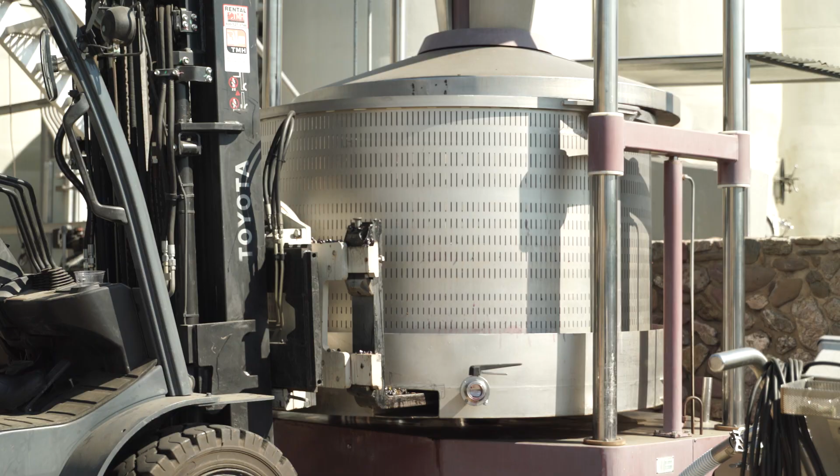This area where I'm standing today is part of the vineyard-rich region of Northern California in the United States. The natural beauty of this vineyard is a testament to the timeless art of winemaking. But however timeless, over the millennia, winemaking has undergone some notable changes. Since our ancestors first stumbled upon the first glass of wine and the concept of fermentation, winemaking has evolved into a modern art that leverages the technologies of the 21st century.

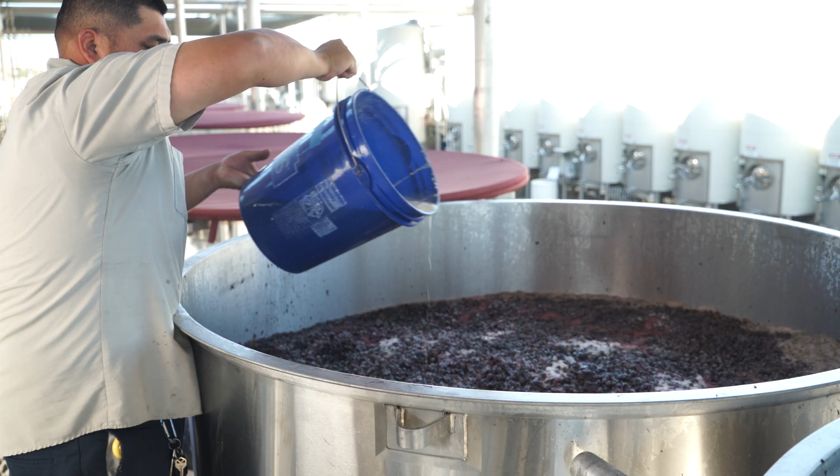Nowadays, technologies like machine harvesting, automated bottling, and advanced lab testing equipment are available to increase the efficiency and intricacies of winemaking. Regardless of the technologies that a winery chooses to adopt, every winery follows wine's natural scientific formula, namely fermentation. During the fermentation process, the sugar in the grapes is consumed by yeast and converted to alcohol, heat, and carbon dioxide. The released carbon dioxide protects the fermenting juice from oxygen, and in this anaerobic environment, grape juice becomes wine.

Wines are generally considered a low microbiological risk product because of fermentation and the resulting product parameters. Parameters like pH, alcohol content, organic acids, polyphenols, and sulfites render the wine free from any pathogens. Today we will take a journey through the general process of commercial wine production and throughout each stage demonstrate the proper processes and controls for ensuring a safe product for the public, all the while emphasizing how wine is naturally a microbiologically safe product.

The production of wine starts in the vineyard. Throughout the harvest season, which can begin as early as July and end as late as October, the grapes are picked from the vines. During this time, wineries work around the clock harvesting grapes for production. The winemaker makes a calculated decision about when to pick the grapes. Various indicators like acidity and sugar levels, as well as seed color, firmness of the skins, and berry taste are evaluated to determine the exact picking time.

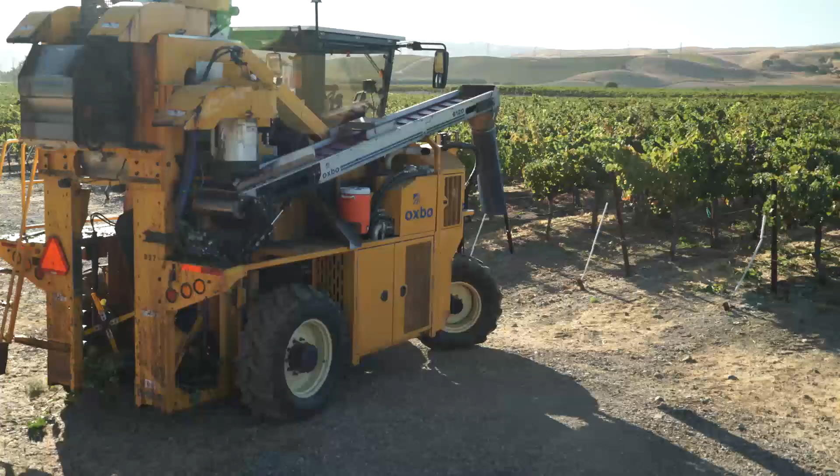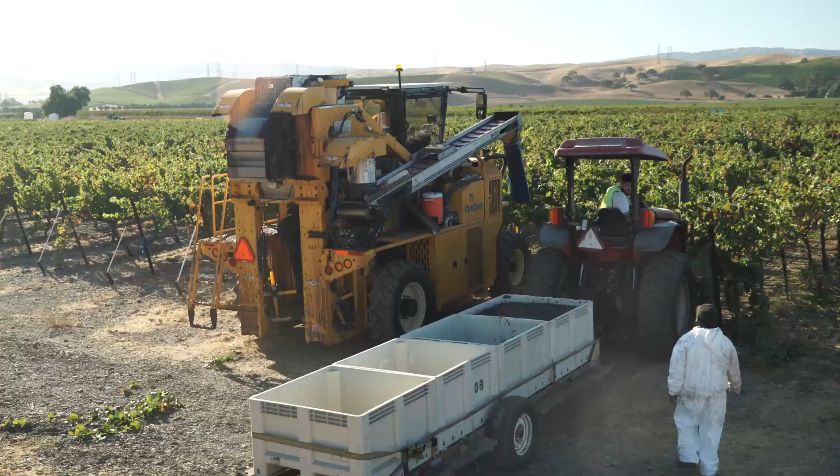There are two types of harvesting methods used by wineries. The first is machine harvesting. Machine harvesting occurs more often at large-scale wineries, seeking to decrease labor costs and harvest time. When performing a machine harvest, a vehicle moves through the vineyard, straddling and shaking the vines to remove the grapes. The second, more traditional harvest method is handpicking. This method is used by many wineries and is often preferred by winemakers for more valuable grapes, since it is a gentler method and yields a higher return on grapes per row.

After harvesting, the grapes are evaluated and any materials other than grapes are removed. This is an important step that workers take to adequately screen the crop for materials such as leaves, twigs, or anything else that is not essential to processing. Let's highlight the takeaways from harvest. Two methods to harvest: machine versus handpicked. Steps to protect the juice are taken very early on. Materials other than grapes, also known as MOG, are removed.

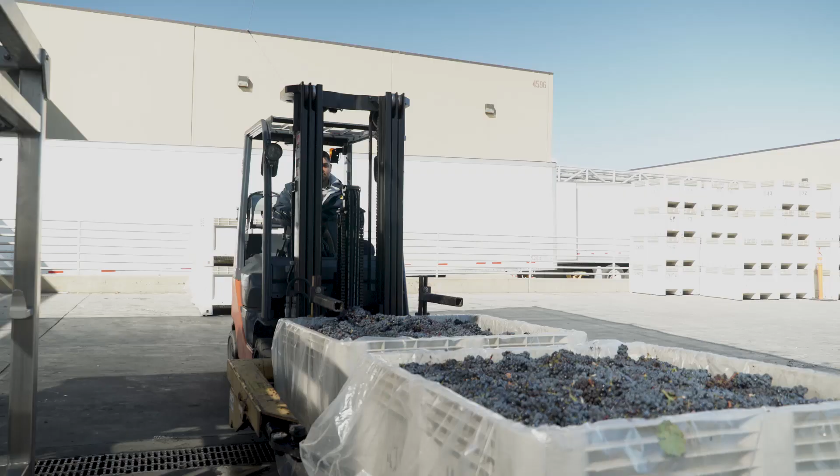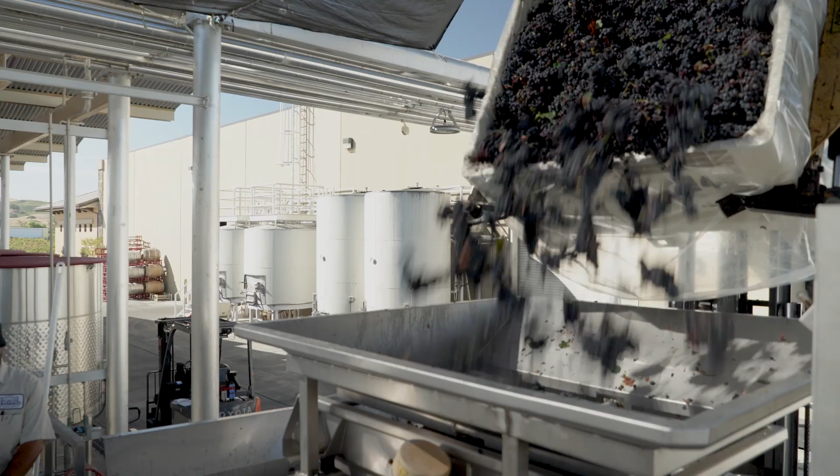Within a few hours of harvesting, the vineyard is barren and the grapes begin the journey to the winery. These grapes are offloaded at a receiving area near the fermentation tanks. Processing usually begins as soon as the grapes arrive. The first step in wine processing is transferring the grapes from the large bins to a crusher to be destemmed and delicately broken.

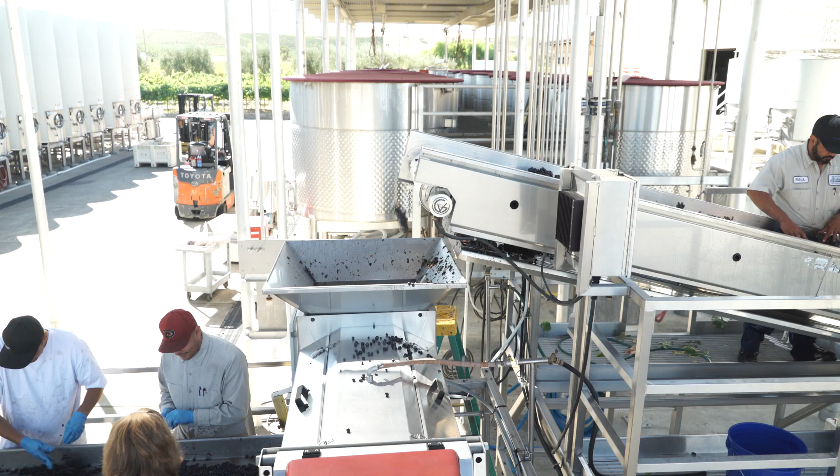After each load of grapes is put into the crusher, the bin is cleaned based upon the facility's standard operating procedure. At this winery, the bins are power rinsed to ensure they are sufficiently cleaned for the next batch. Right before the grapes are crushed, the stems are removed and sent down a conveyor belt.

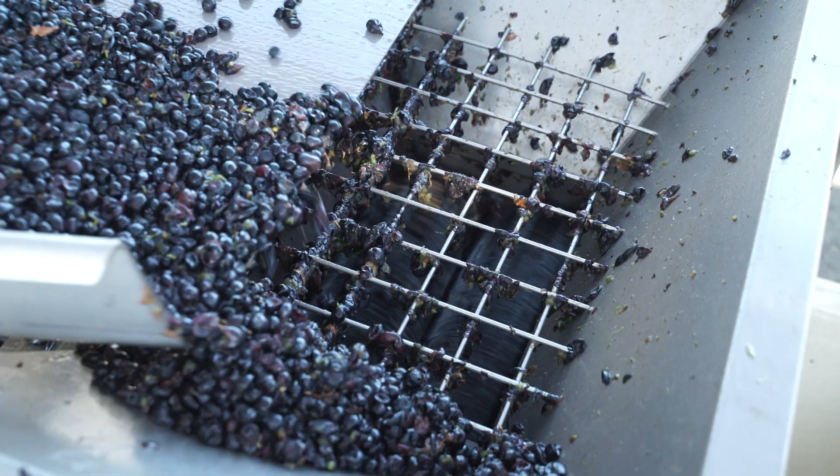Sometimes wineries choose to evaluate any materials other than grapes a second time on the conveyor belt. During the crushing phase, the objective is to open the grapes just enough to mix with the yeast so that it will induce fermentation in the tanks. Ensuring a gentle crush is essential. A grape that is opened too forcefully could crush the seeds, which would release bitter oils or tannins that create an undesirable taste profile for the wine.

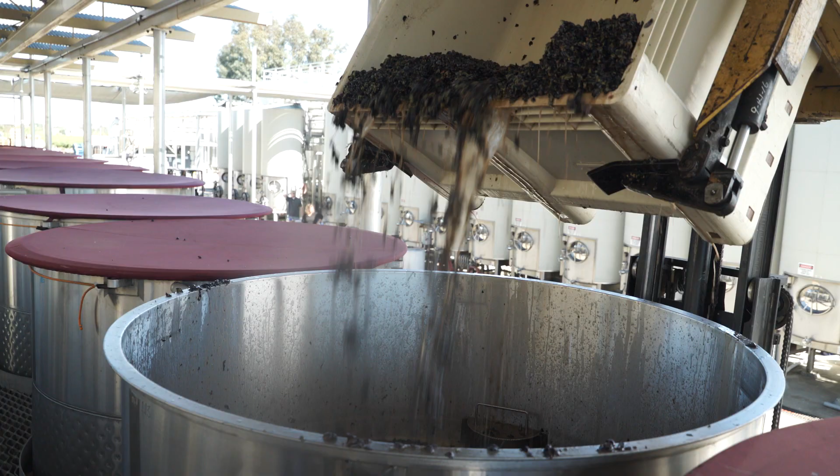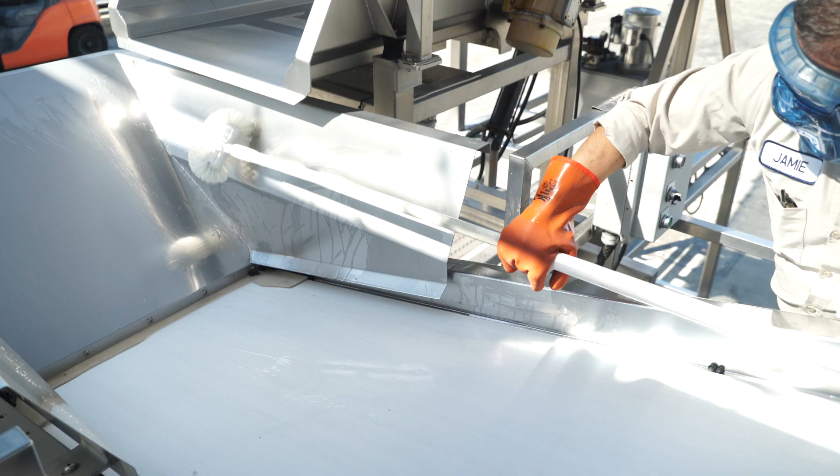Crushing the grapes and removing the stems are steps taken prior to the must entering the fermentation tanks. Must consists of the skins, free juice, and other suspended solids of grape material that results from the crushing phase. Prior to the must entering a fermentation tank, all equipment involved in processing is cleaned and sanitized. Once cleaned and sanitized, all equipment is properly stored.

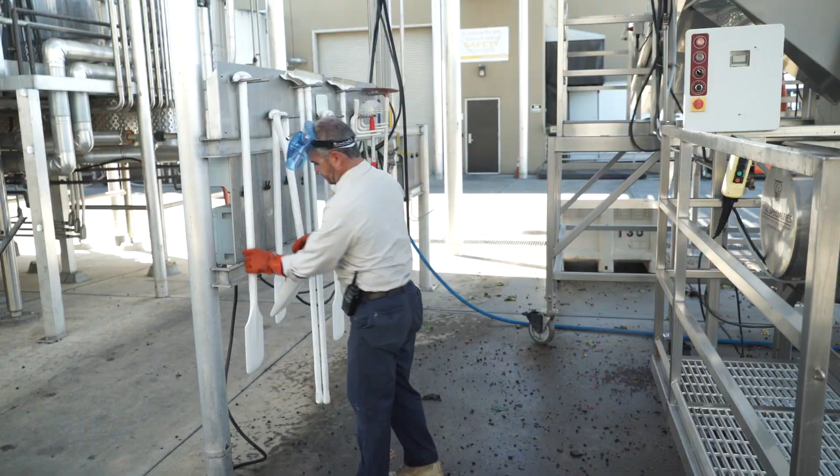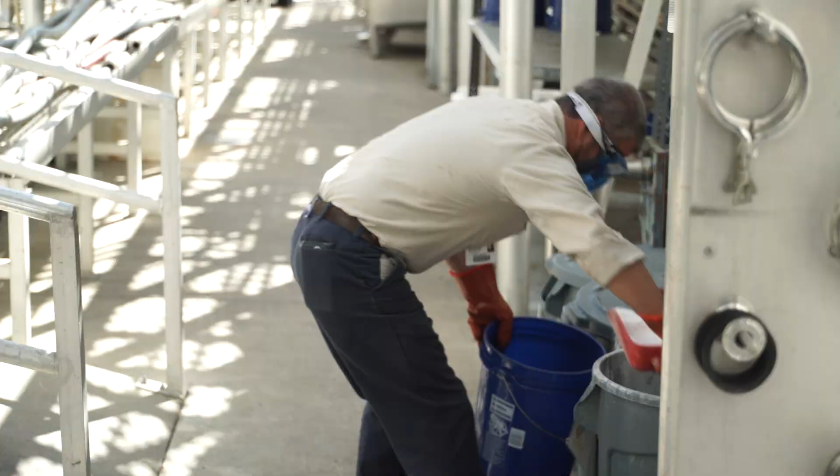Cleaning and sanitation are critical parts of the winemaking process, and the winemaker understands that all equipment that encounters the juice or wine at any time in the process must be cleaned and sanitized using acids, bases, and oxidizing chemicals. Whenever chemicals are used to clean equipment, a worker takes sufficient safety measures by wearing proper personal protective equipment, also known as PPE.

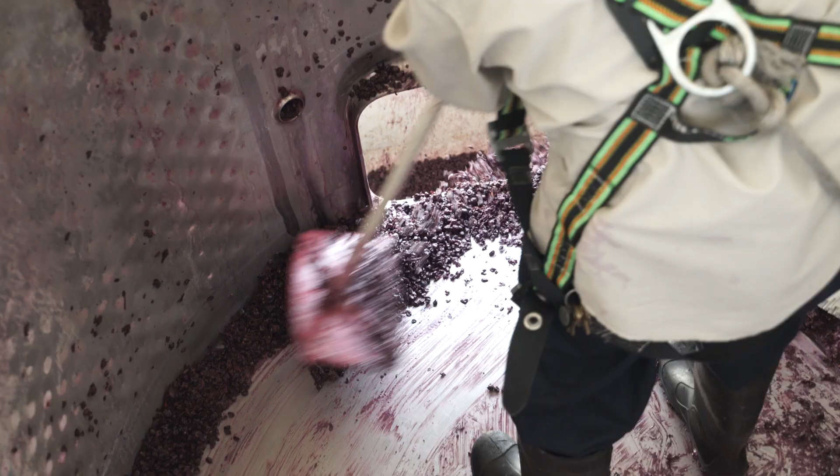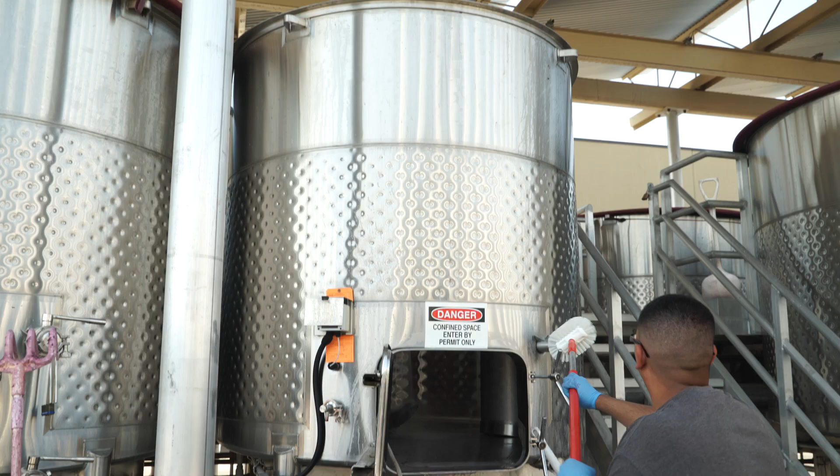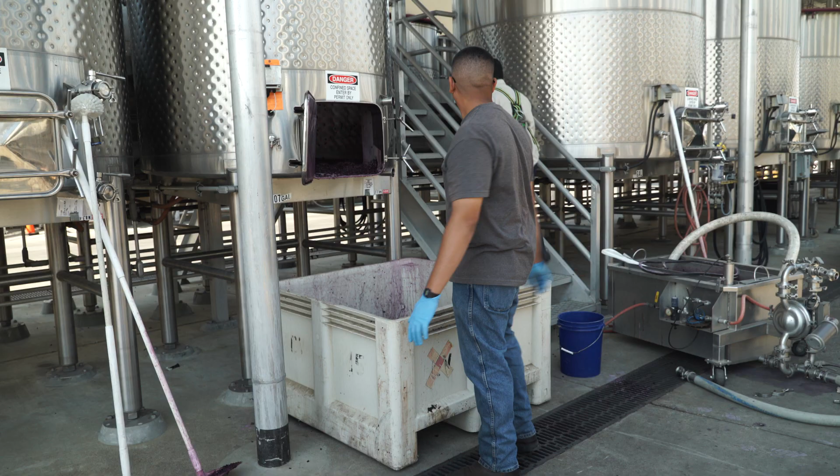A winery's standard operating procedure would dictate the cleaning of the tank. Many fermentation tanks like these are made of stainless steel, since it is an easy material to clean and sanitize. Oxygen levels are also monitored and brought to a safe level before anyone enters the tank. One worker remains outside the tank while the other cleans and sanitizes the inside of the tank. The fermentation tanks are cleaned and sanitized before and after usage. A winery worker will record the date and time of cleaning and sanitation on a log sheet and the tank itself.

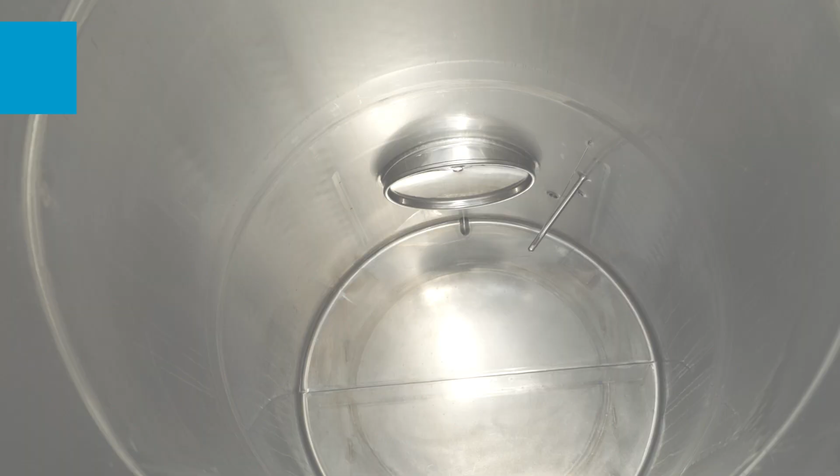Although red and white wine production differ, all cleaning and sanitation concepts and practices are the same. Let's highlight the sanitation practices. Tanks and equipment are sanitized frequently to prevent contamination. Sanitation is part of good manufacturing practices. Equipment is stored in its appropriate locations.

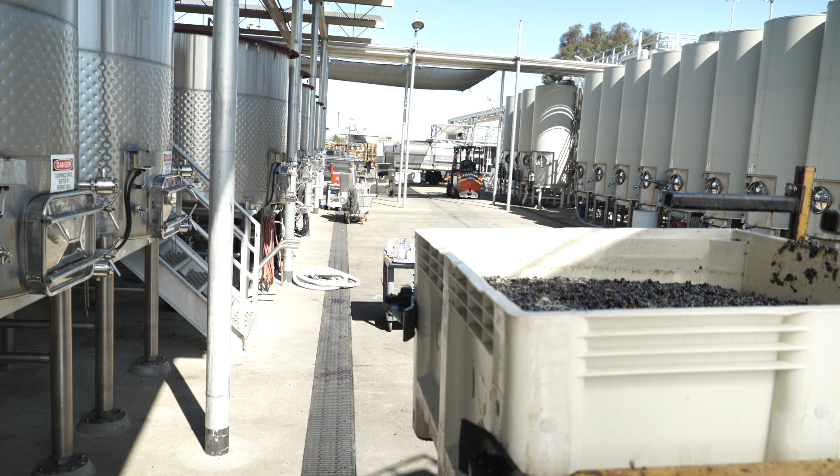In this section, we will focus on how red wine is made. For red wine, the lightly crushed grapes are first moved to a clean and sanitized tank. Once in the tank, dry ice is sometimes added to keep the must cool and preserved. After the tank is filled with the must, fermentation is initiated by adding commercial yeast, a process also known as inoculation.

While the wine ferments, the yeast converts the sugar contained in the must into alcohol, or more specifically, ethanol. The ethanol helps extract the grape skin and seed compounds, which give red wine its color, mouthfeel, and taste. This process is known as maceration. Throughout fermentation, the must is mixed or recirculated. This happens daily to help extract color and flavor compounds from the grape skins.

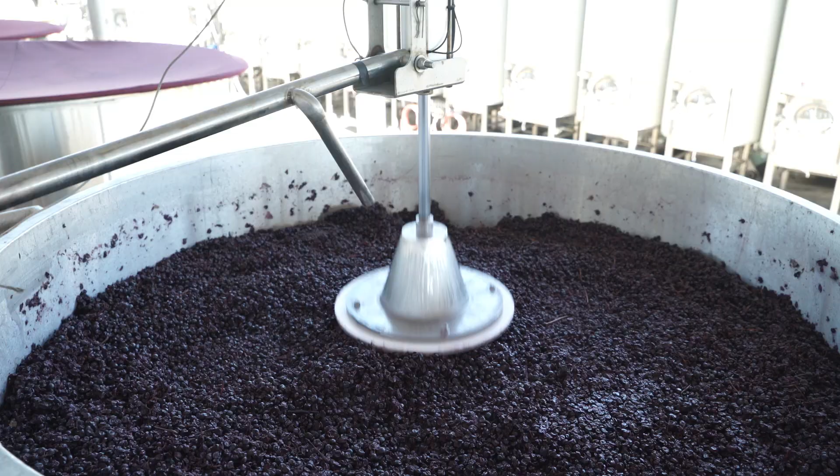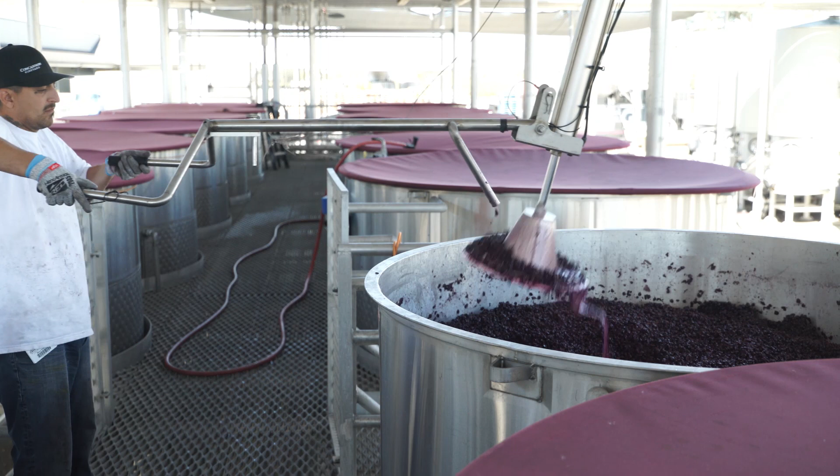Mixing also occurs to keep the temperatures in the tank homogeneous, as heat, which is generated during fermentation, accumulates in what winemakers refer to as the cap or surface of the mixture. The cap is mostly grape skins that rise to the top of the fermenting must due to the production of carbon dioxide. There are two methods for mixing. One is called performing a punch down and the other is a pump over. Both are popular choices among commercial wineries. This worker is performing a punch down.

During fermentation, the winemaker makes important additions to the wine. Potassium metabisulfite is commonly added as a preservative to prevent microbial spoilage. It can also be added to the must prior to fermentation. Found in all wines, sulfites occur naturally as a byproduct of fermentation and are often added to prevent oxidation and bacterial spoilage, thereby enhancing taste, color, and stability of table wines.

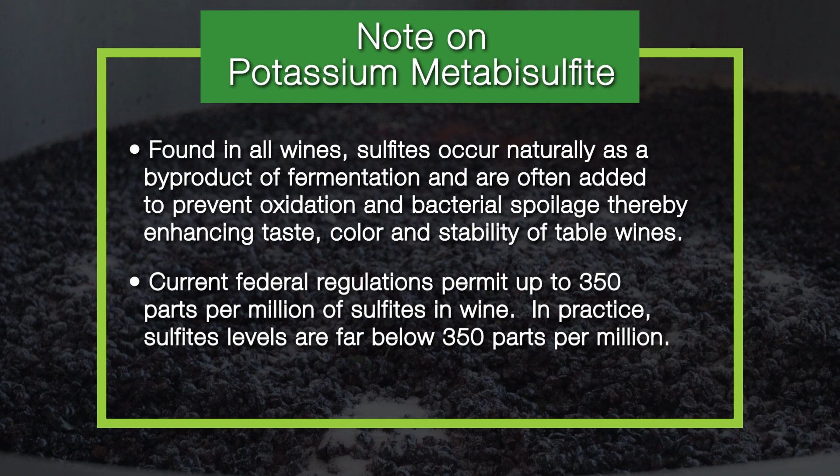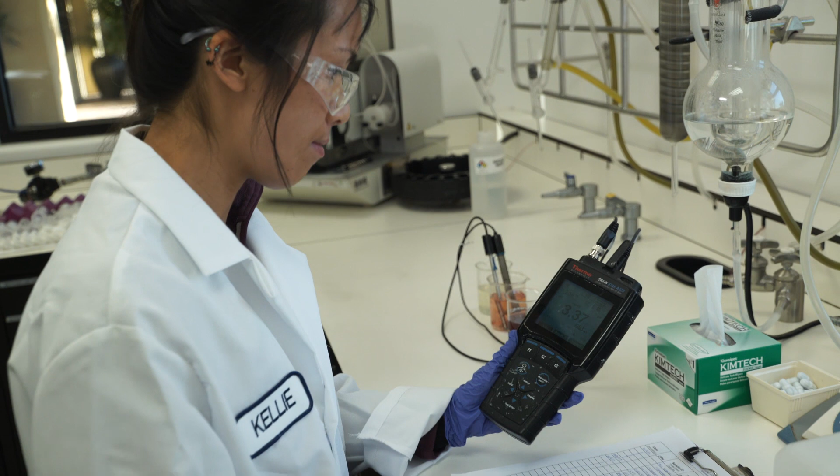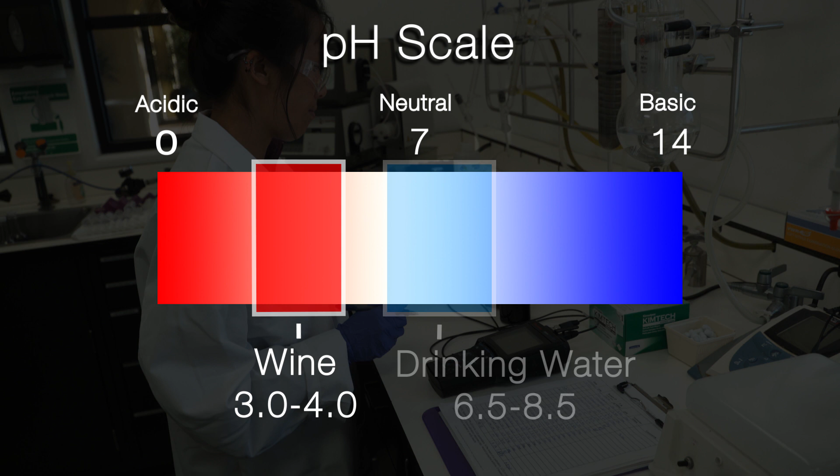Current federal regulations permit up to 350 parts per million of sulfites in wine. In practice, sulfite levels are far below 350 parts per million. Wine relies principally on pH for preventing the growth of undesirable microorganisms. For this reason, the wine is monitored and maintained below a pH level of 4.6. Many wines have a pH range between 3 and 4, which is very acidic. In comparison, a pH of 7 is neutral, and drinking water ranges from 6.5 to 8.5.

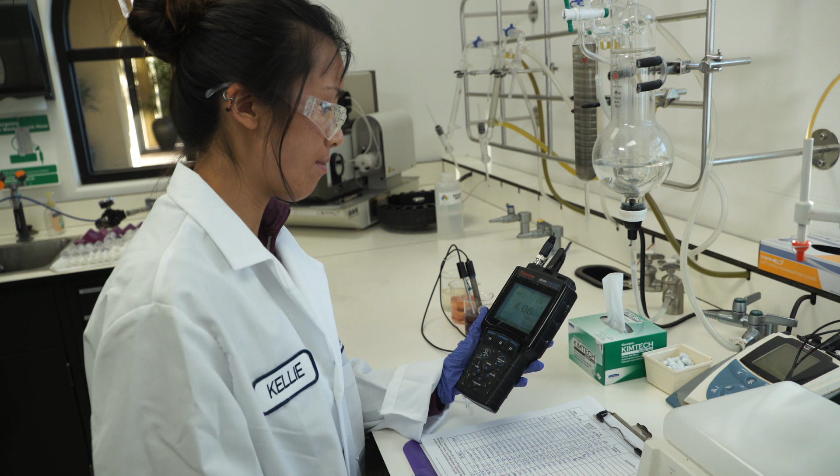The low pH of wine provides significant protection from pathogens. Most foodborne pathogens like to be at or near neutral pH and do not survive below a pH of 4.6. If needed, the pH can be adjusted by adding organic acids.

Tartaric acid is a very commonly used additive because it is the most prevalent naturally occurring organic acid contained in grapes. During fermentation, wineries perform lab analysis to monitor fermentation progress as the alcohol content goes up and the percentage of sugar goes down.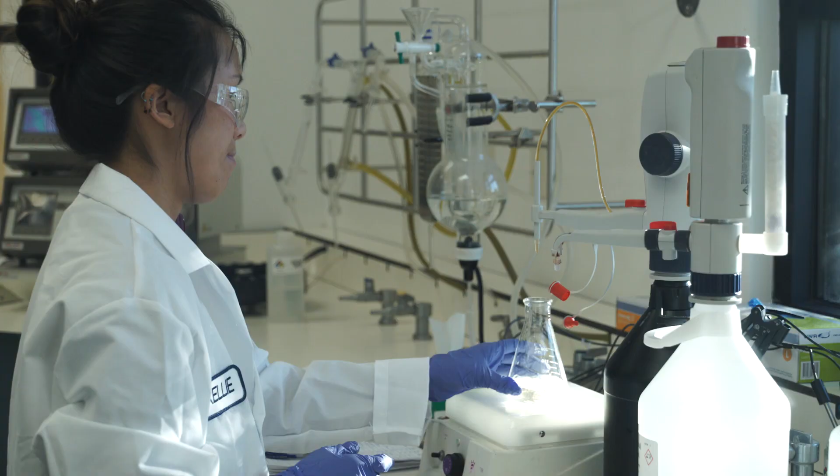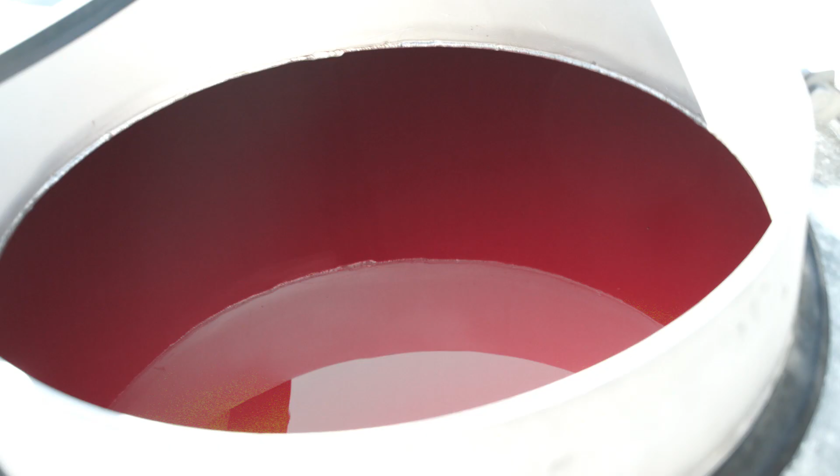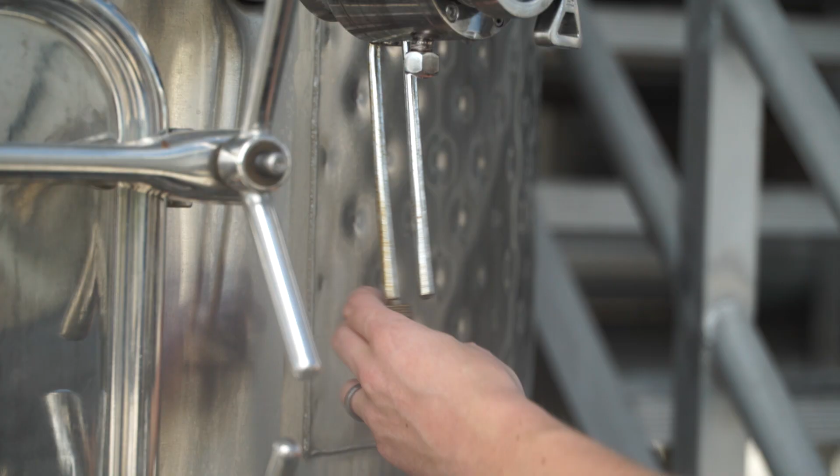Outdoor and indoor fermentation tanks are often left partially open to allow fermentation carbon dioxide to escape. Again, this is acceptable as undesirable microbes in the air do not survive inside the tank's environment. When not in use, all outer openings to the tanks and other processing and storage areas accessible to people are adequately secured and monitored. Here a worker is locking the opening of the fermentation vessel.

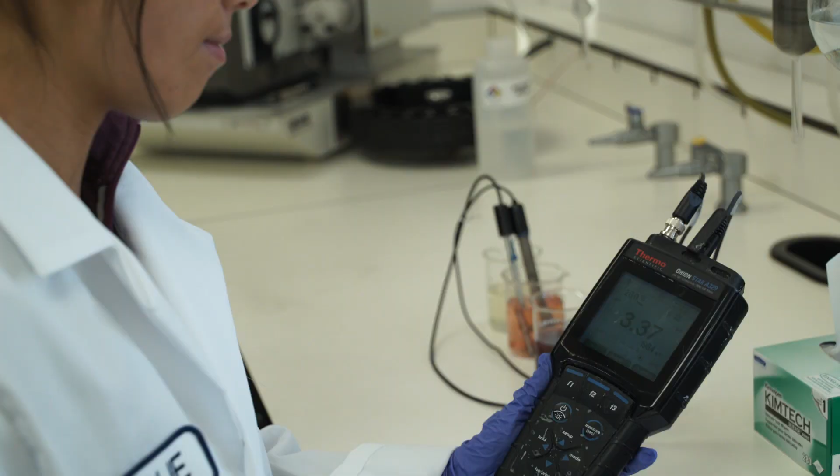Let's highlight the key food safety takeaways from fermentation. Fermentation is initiated by inoculating with yeast. The fermenting wine is kept at an acidic pH well below 4.6. Most foodborne pathogens do not survive below a pH of 4.6. The winemaker takes routine samples of the wine to monitor fermentation progress. While at the initial stages of fermentation, there are typically different organisms present. By the end of fermentation, only a very few, all non-pathogenic organisms survive in the low pH alcoholic environment.

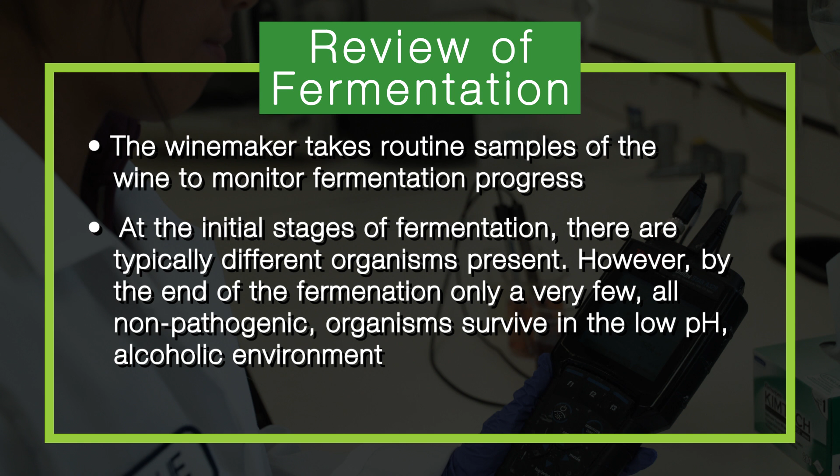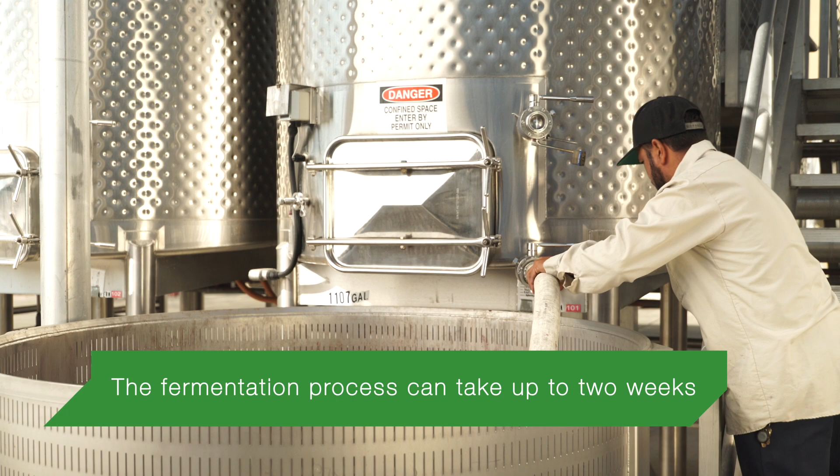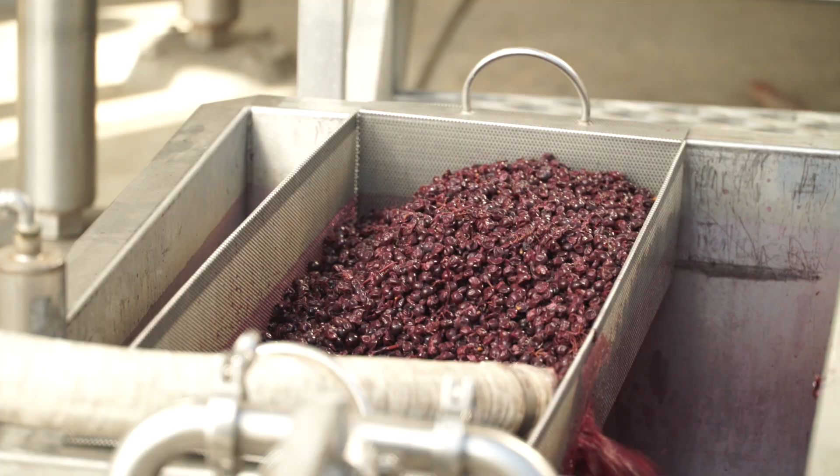Remember that when producing red wine, the mixture in the fermentation tanks is comprised of the grape skins at the top and the pulp and juice at the bottom. After about 2 weeks of fermentation, the juice becomes wine, and the next step is to transfer the wine to a receiving tank. First, a hose is connected to a valve at the bottom of the tank. The hose then pumps the wine through a small strainer to ensure no solids pass through before it is pumped into the receiving tank. This is known as free-run wine.

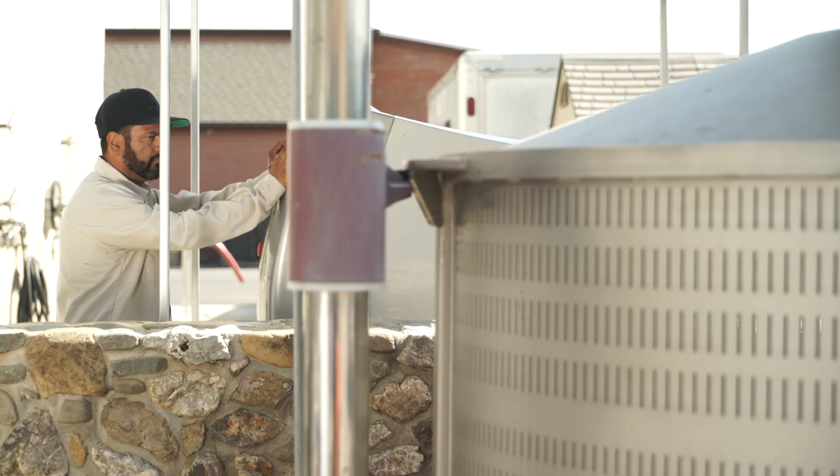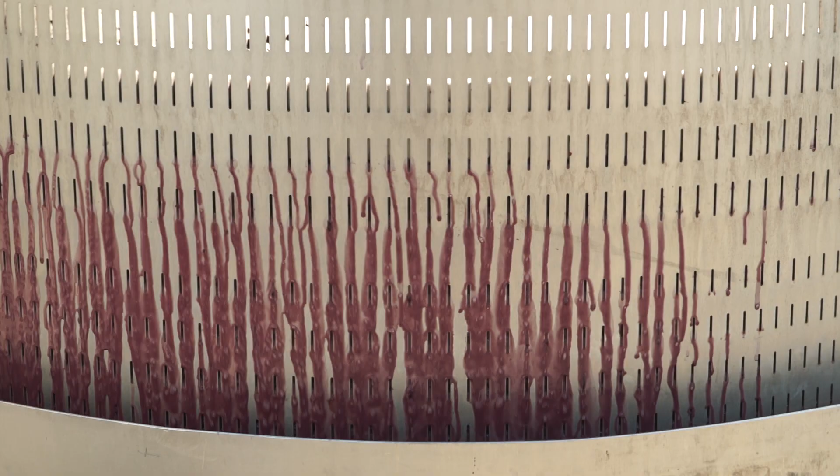The bulk of the remaining skins from the cap are placed into a basket press. The basket press resembles a jumbo-sized kitchen strainer. Once filled, the skins and other solids are pushed down to free the remaining liquid. The press pushes the solids down in microbursts and can take up to a couple of hours to free all the wine from the solids. Afterwards, the freed wine is transferred from the presser via a hose to the same receiving tank the liquid at the bottom of the tank was pumped into.

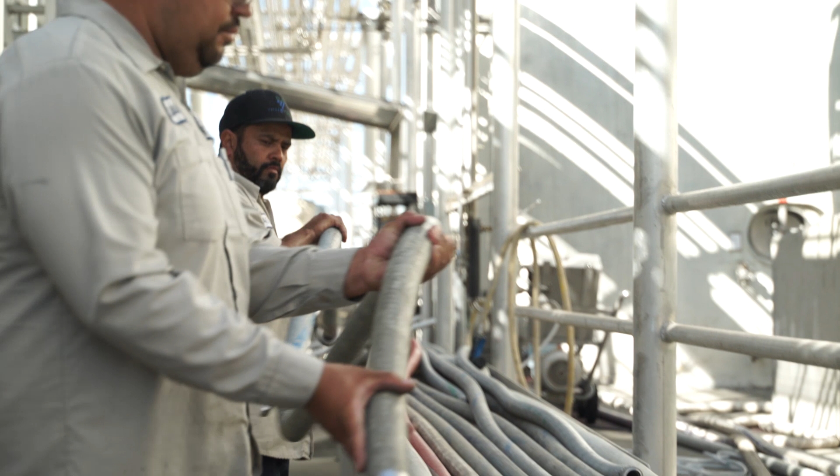After pressing, the red wine is left to settle for a few days in the receiving tanks before being moved into oak barrels or another kind of storage vessel. After use, the hoses and processing equipment are properly cleaned, sanitized, and stored on long racks to promote cleanliness.

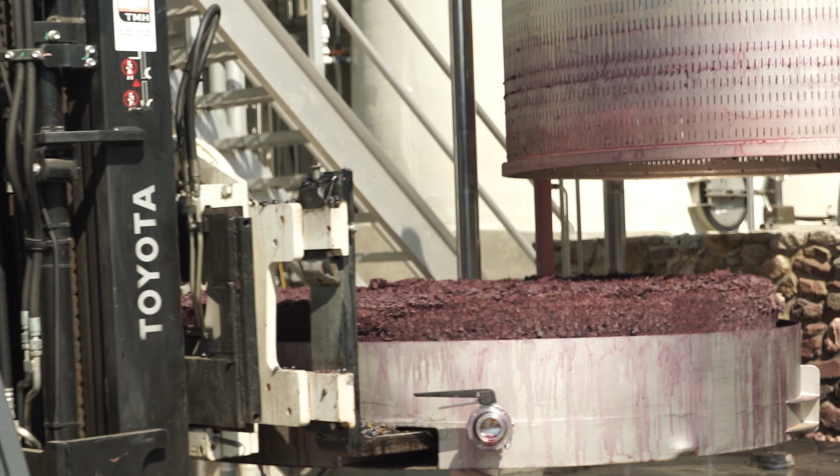In red wine production, the remaining material from pressing is called pomace. Pomace is the dry, blackish-red debris consisting of grape skins and seeds. Sometimes wineries sell and ship pomace to other facilities as animal feed. Because the pomace was produced following standards of processes for human food, which are more rigorous than the standards for animal feed, it can enter the animal feed supply stream safely after packaging and labeling protocols have been sufficiently followed.

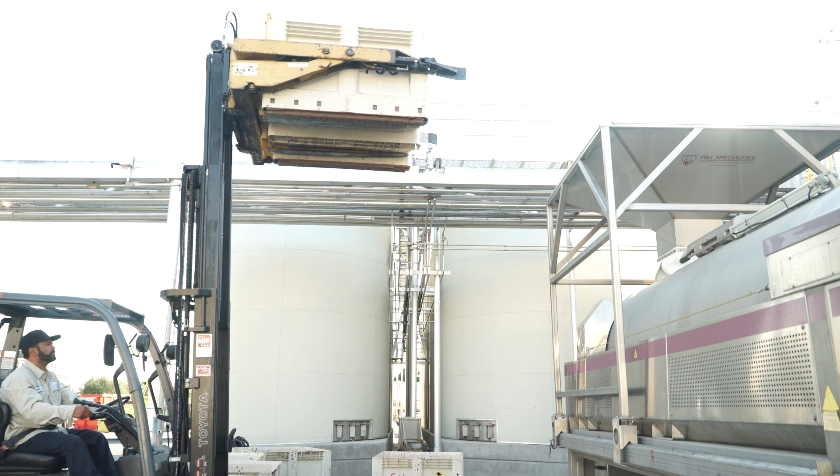The distinguishing feature of white wine production is that contact between the grape skins and the juice during fermentation is minimal. The fermentation process for white wine is typically slightly longer and cooler than it is for red wine. The longer and cooler fermentation helps to preserve the delicate flavor and aromas of the white grapes. All cleaning and sanitation concepts and practices are the same.

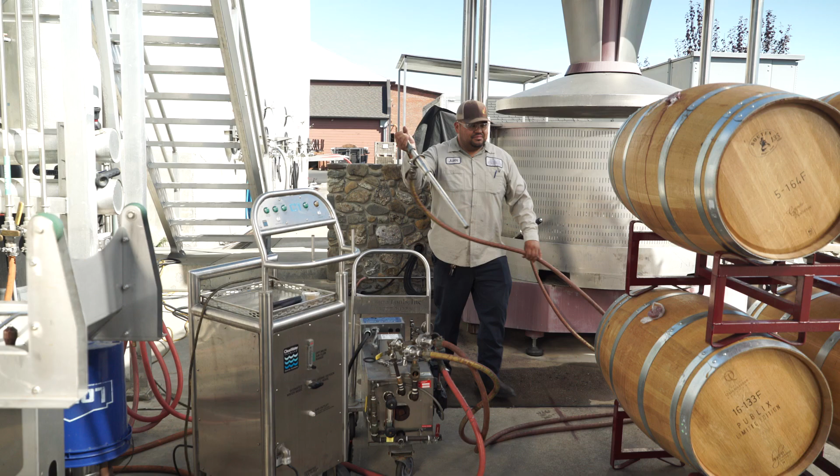Let's check back on our red wine. After the red wine has settled for a few days in the receiving tanks, the wine is placed into oak barrels or other storage vessels. Before filling, the inside of the vessel is sanitized based upon the facility's standard operating procedure. At this winery, barrels are sanitized using high-pressure steam and ozonated water.

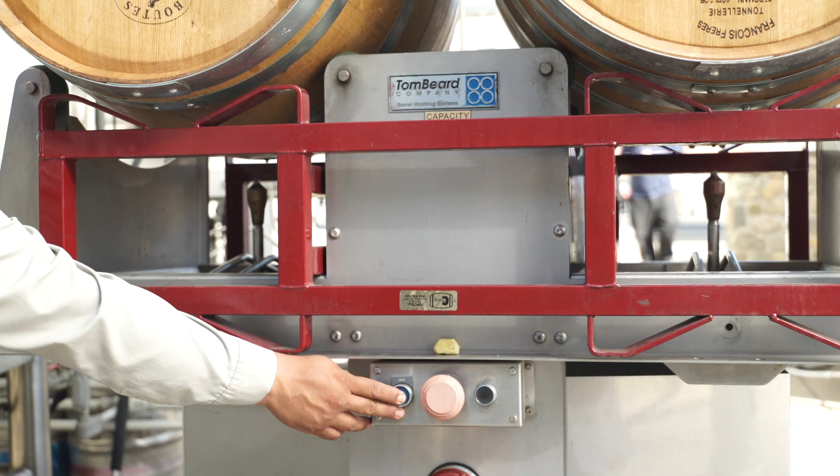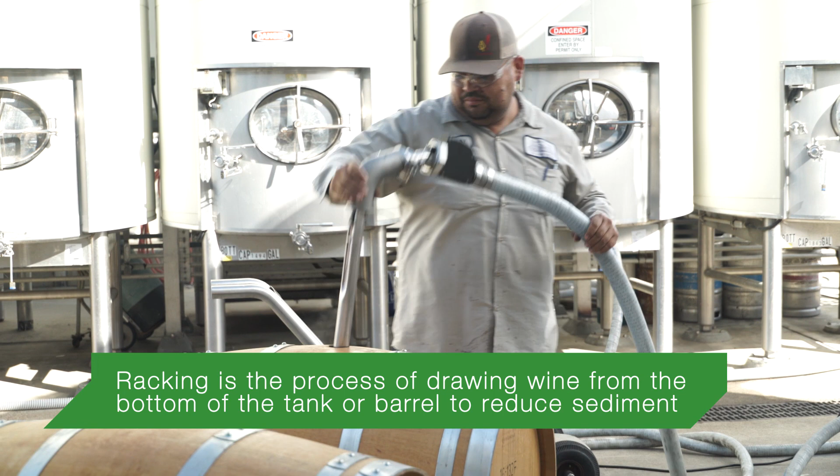Once the storage tank or barrel is sanitized, wine is moved to the vessel in a manner that separates the naturally clarified wine from the solids on the bottom of the fermentation tank. This process is known as racking. The barrels are filled manually to avoid spillage.

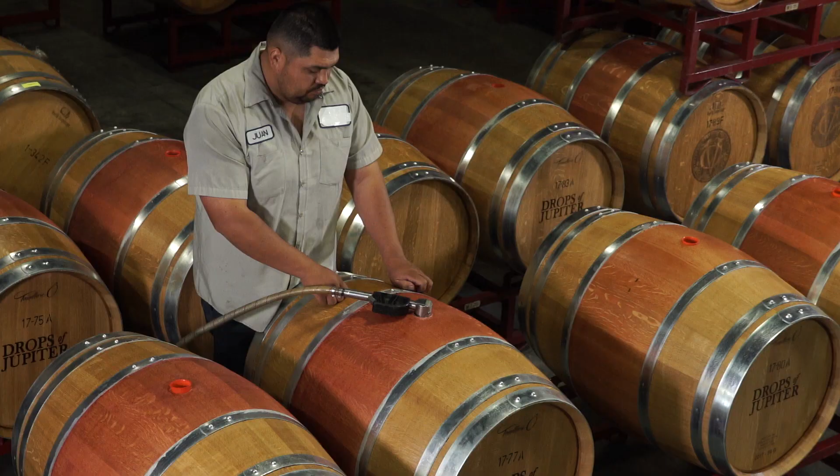Once the barrels have been fully filled, they are stored in a temperature-controlled room. In this case, the barrels are stored at 52 degrees Fahrenheit or 11 degrees Celsius. The wine will be aged in barrels for 12 to 36 months prior to blending to soften the wine. During barrel aging, a small fraction of the wine evaporates. To prevent air contact, which could affect the quality of the wine, the barrel is regularly topped up with more wine during this stage.

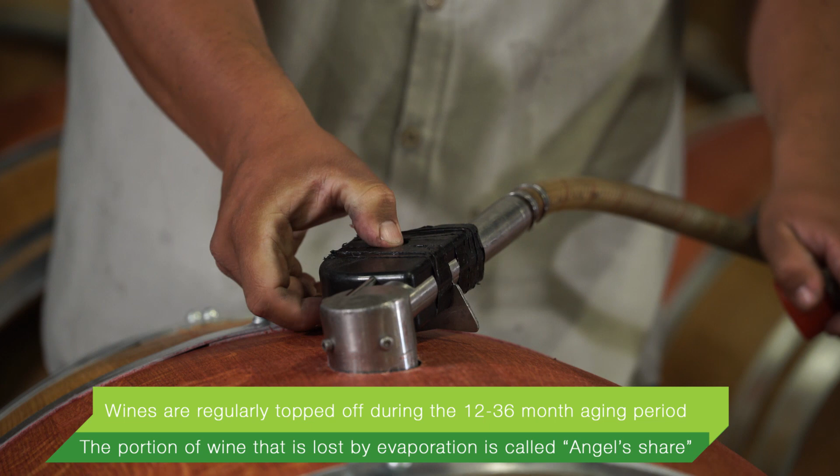Additionally, ongoing tasting and analysis occurs throughout the stage for quality control. Let's review the movement of wine to storage tanks and barrels. The vessels storing the wine are adequately cleaned and sanitized prior to use, according to the winery's standard operating procedure. Pipes and fittings are cleaned and sanitized prior to use. The vessels are dated and marked for tracking purposes. The wine is stored in a temperature-controlled room to maintain quality.

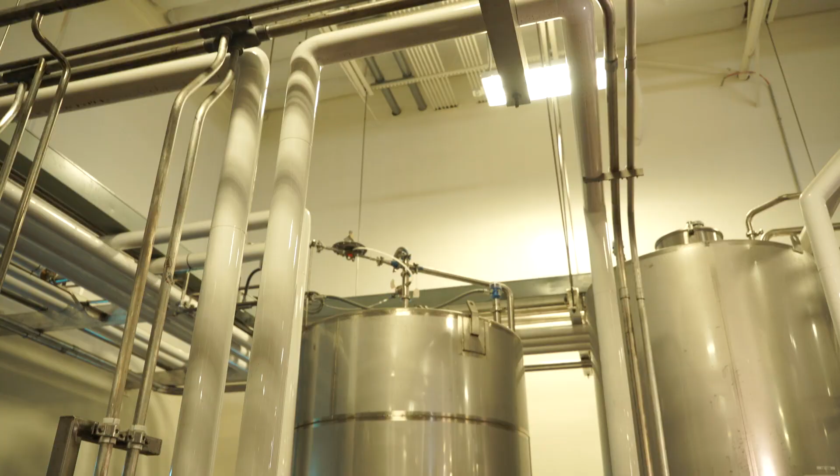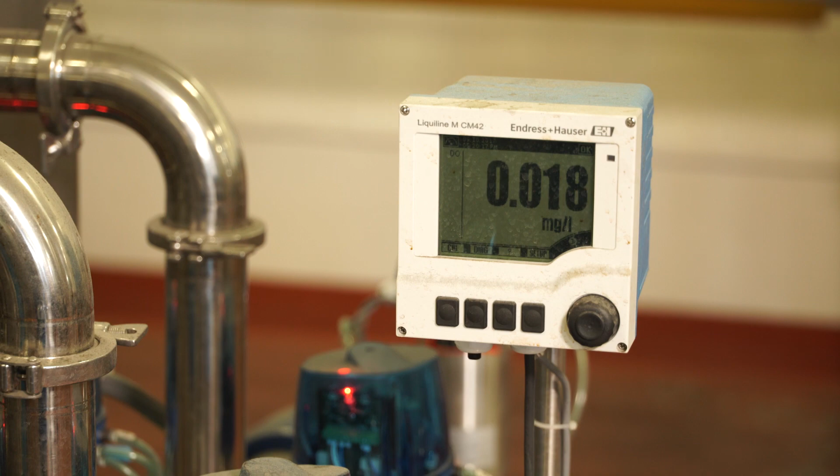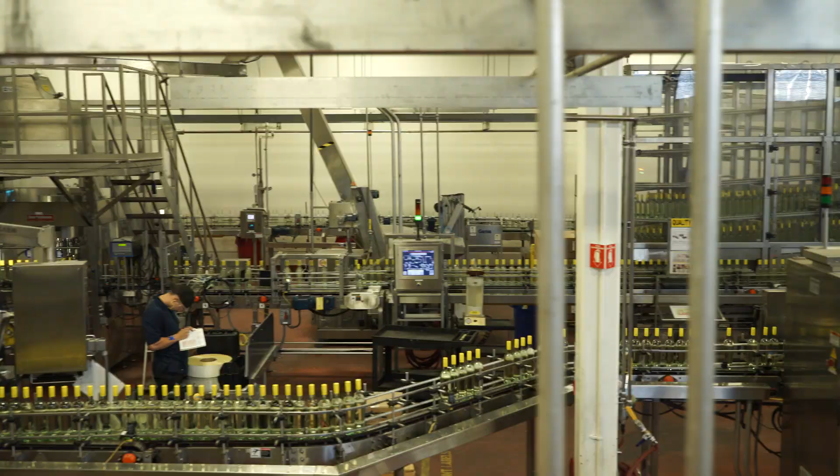When the aging phase has concluded and the blend is determined, wines are transferred from the barrels or storage tanks to blending tanks, after which the wine passes through a filter to ensure any remaining solids and wine-related yeast or bacteria are removed. This filtration, the last step prior to bottling, makes the wine crystal clear by removing any solids. Many wineries filter the wine twice before the bottling stage, according to their winery's standard operating procedures. At this point, the wine is ready to be bottled.

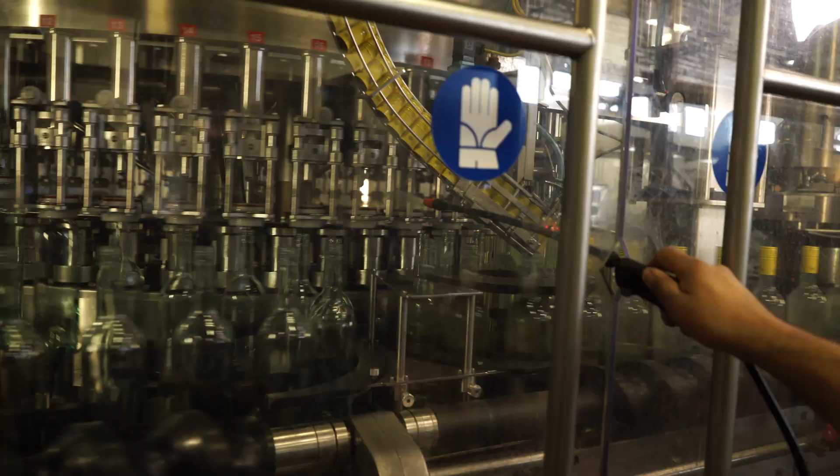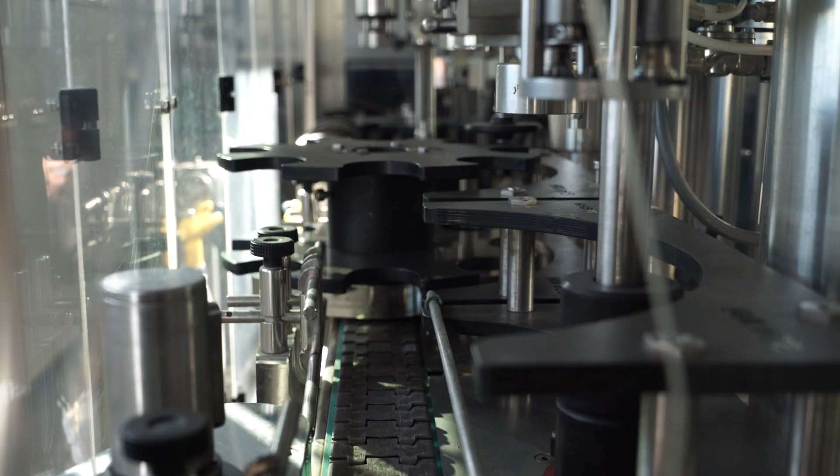Bottling is the critical final step in the process, where the utmost care is taken to ensure the tanks, pipes, and filling equipment are clean and sanitized. In large wineries like this, the bottling facility is a complex, highly controlled, automated operation. In addition to complex automated facilities, many wineries use what are called mobile bottling facilities, which are housed in a trailer and moved on-site for bottling operations. Wineries are advised to contract with mobile bottlers who are registered with the United States Food and Drug Administration and have standard operating procedures and good manufacturing practices pre-approved by the facility.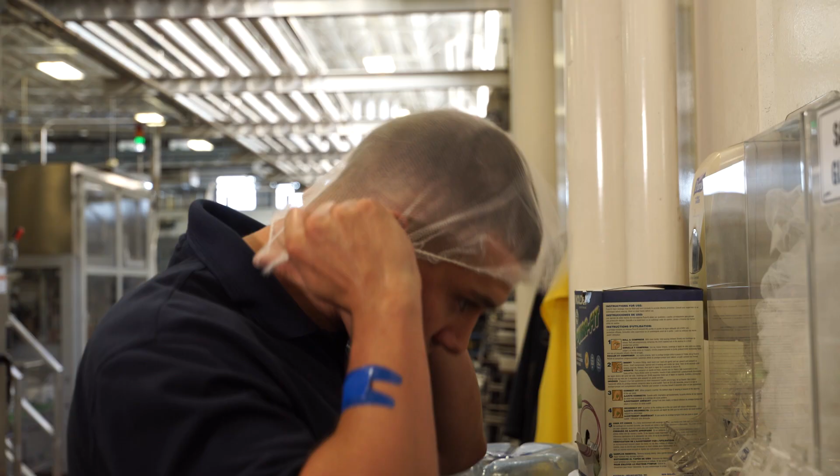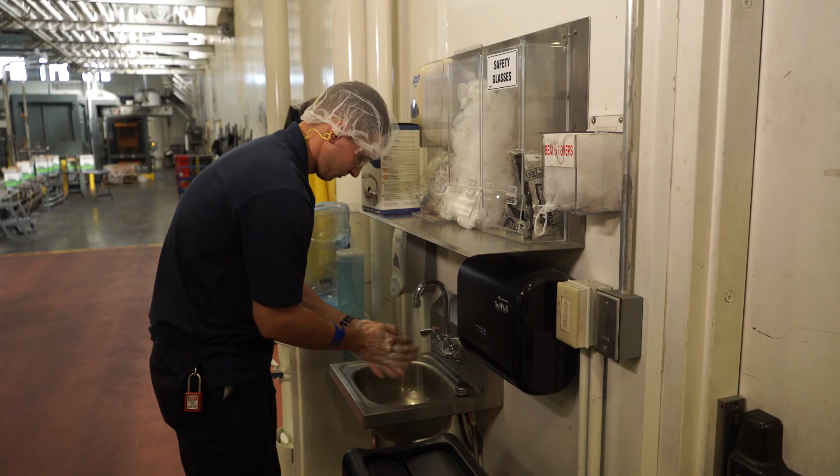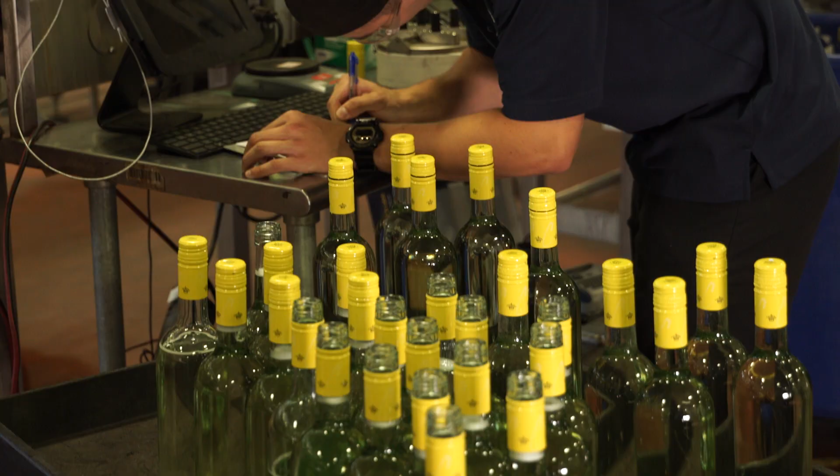During the bottling stage, workers take appropriate protective measures in accordance with their winery standard operating procedure. At this facility, employees wear hairnets and protective eyewear and gloves, called PPE, or personal protective equipment. Also, hand-washing sinks are located around the facility, and wineries require all workers to follow established hygiene protocol. Workers do not wear protective suits in the bottling facility due to the microbiologically safe nature of wine and the standards of procedure that every vessel and piece of equipment has been properly cleaned and sanitized throughout the process.

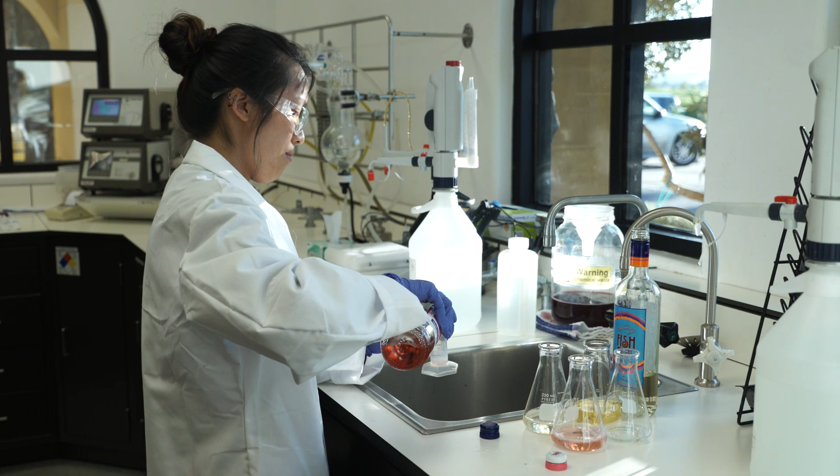As an extra layer of protection, wineries also filter a bottle from the production line in a lab onto a microplate to evaluate for any foreign material and wine-related yeast or bacteria, in addition to performing full bottle analysis as the final steps to ensure a safe, wholesome wine for consumers to enjoy.

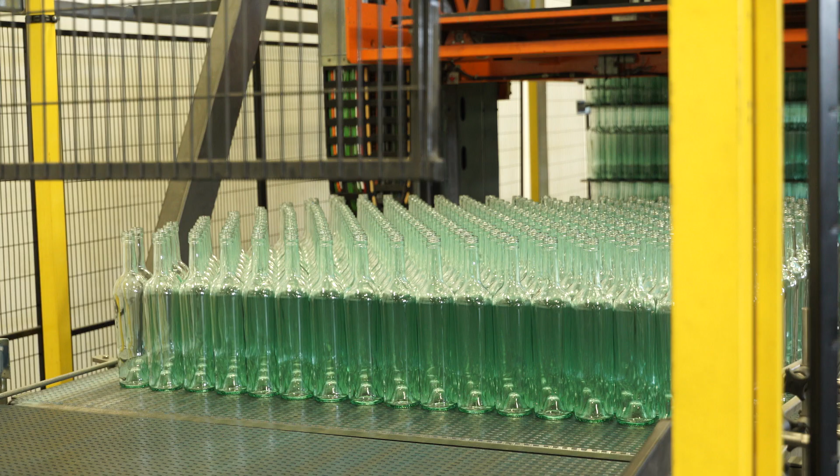The automated bottling line begins with unlabeled, empty bottles on a conveyor belt. First, the glass is blown with a blast of air or nitrogen to clear out any dust or residue. Immediately after, the bottles are filled to a predetermined and checked fill level, and the cork is inserted or cap affixed. Next, foils are fitted onto the bottles prior to labeling. At this winery, the filling and corking apparatus is fully encased to protect the wine from ambient air.

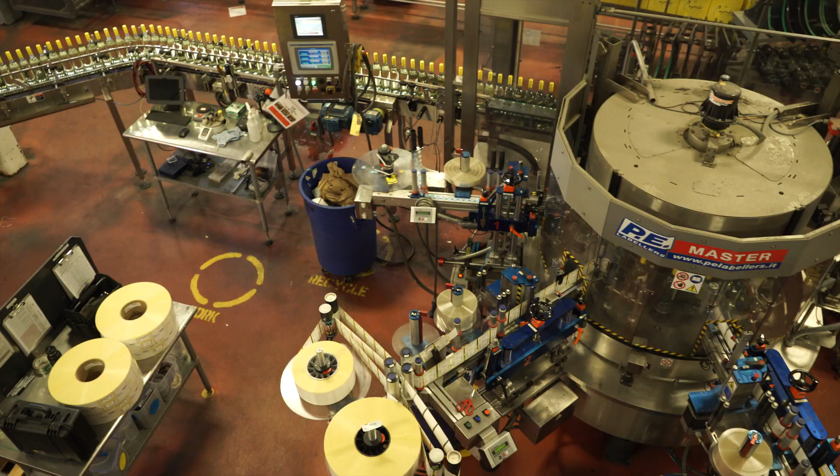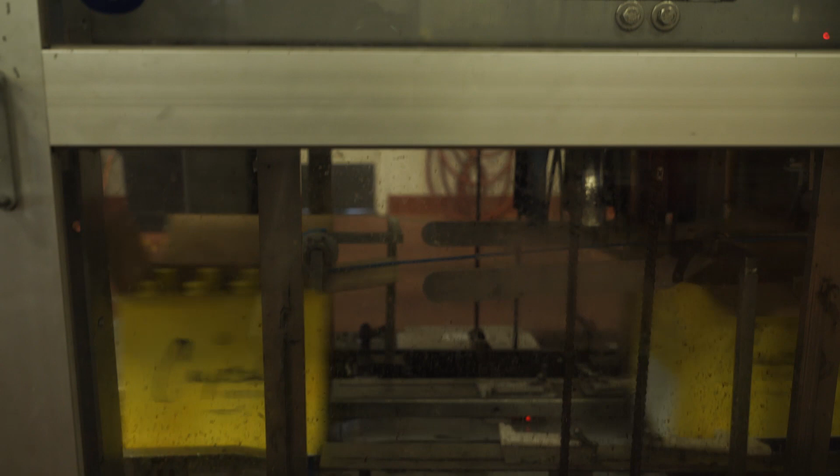The filled and capped bottles move down to the labeling station and then make a final approach to the case. The wines are put in cases, usually by the dozen. Finally, the cases are put on a pallet, saran wrapped, and sent to distribution facilities before hitting the shelves.

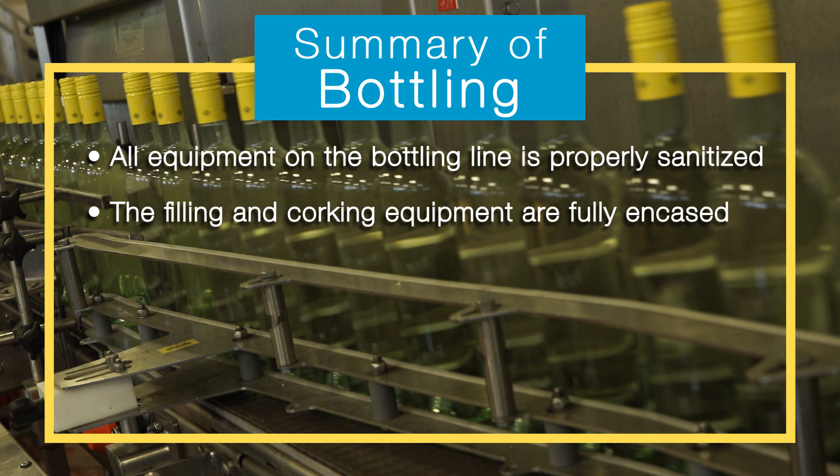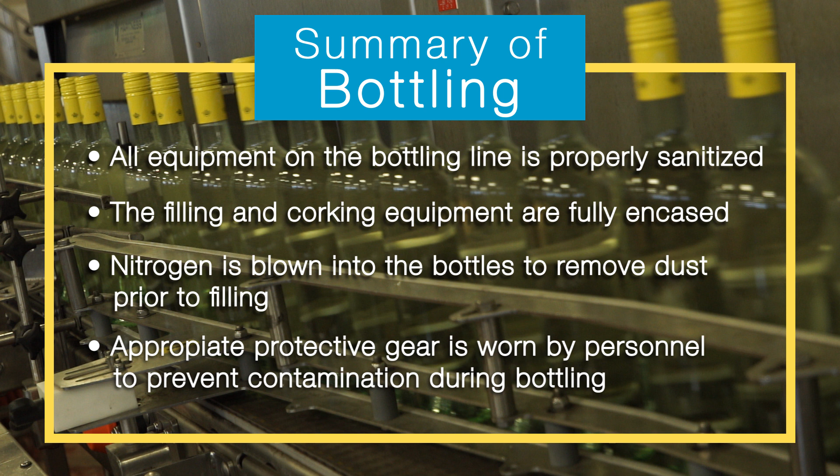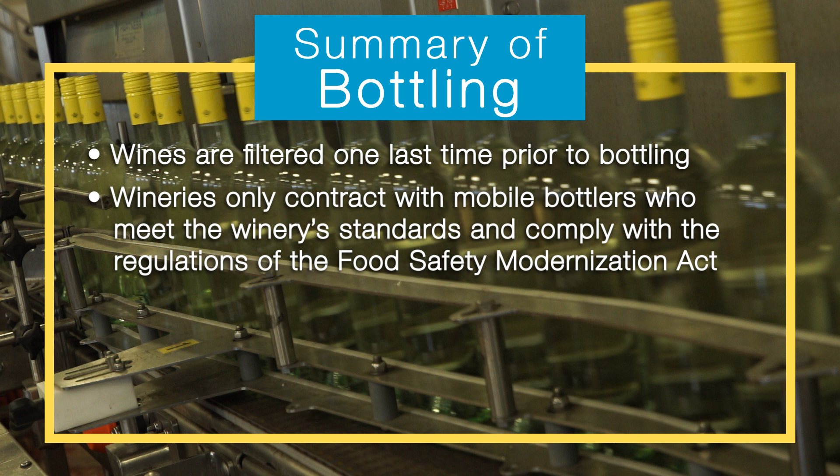Let's review the bottling process. All equipment on the bottling line is properly sanitized. The filling and corking equipment are fully encased. Nitrogen is blown into the bottles to remove dust prior to filling. Appropriate protective gear is worn by personnel to prevent contamination during bottling. Wines are filtered one last time prior to bottling. Wineries only contract with mobile bottlers who meet the winery standards and comply with the regulations of the Food Safety Modernization Act. Remember, good manufacturing practices are followed throughout the winemaking process, and there are no known hazards in winemaking that need a preventative control.

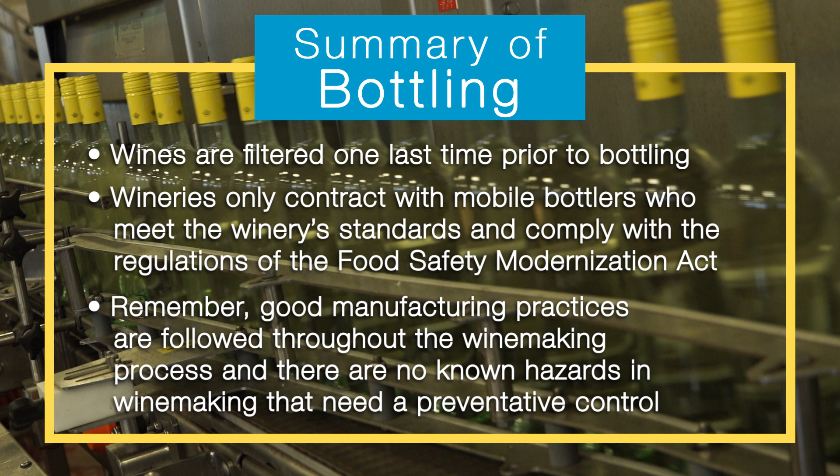Thank you for joining me on a tour of the winemaking process. While the winemaking processes demonstrated in this video may not be fully applicable to each winery in the United States, it has demonstrated a general set of guidelines and processes notable of most commercial facilities in California. I hope you have enjoyed this behind-the-scenes look at winemaking and have learned a little something about what it takes to bring this wonderful beverage to your table.